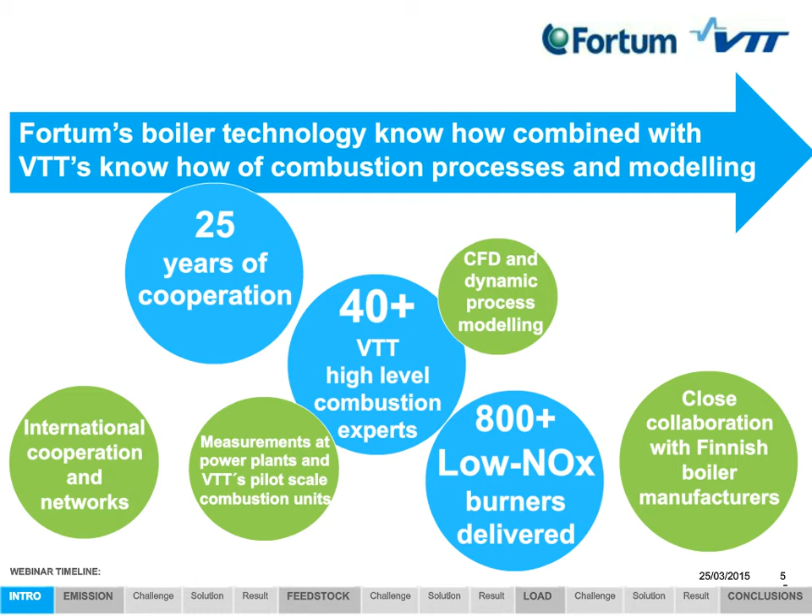Retrofitting old boilers to be more efficient and environmentally friendly. And what is coming more is flexible energy production, meaning the boiler has to be regulated more and more in flexible load changes. Also coming are different types of fuel mixtures, and biomass fuels, maybe co-fired in existing coal-fired units.

As Perttu mentioned in the beginning, we have 3 different cases here. Case number 1 we selected as an example of finding a low-cost solution for minimized emissions. This plant is located in the middle of Finland, the Rauhalahti BFB boiler, and it's actually one of the biggest BFB boilers in the world. Originally it was a PF firing unit, and more than 10 years ago it was converted to a BFB boiler.

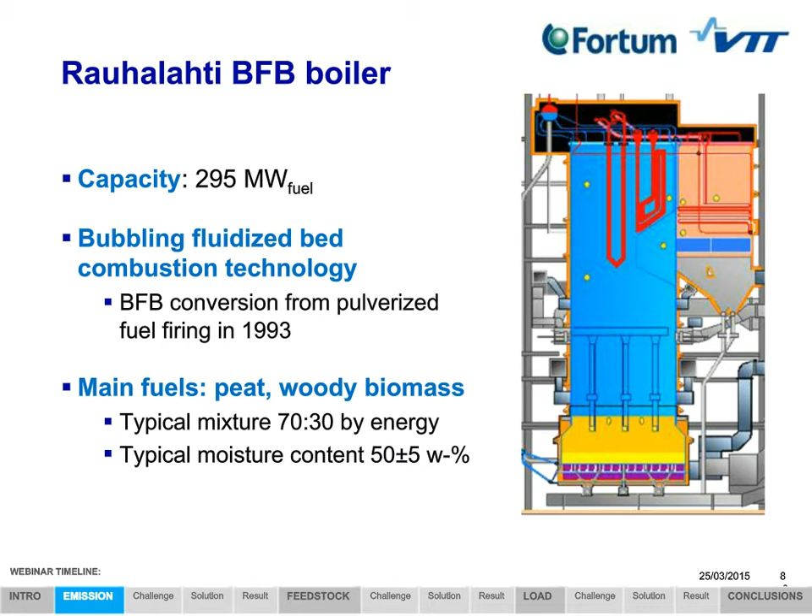The main fuels of this plant are peat and wood-based biomass. Typically, peat is more than 50% and the rest is wood-based biomass. The typical moisture content of the fuel is more than 50%. The challenge in this particular case was to reduce the NOx emissions to the new IED limit. In this plant, the limit is 200 milligrams per normal cubic meter.

As an old plant, the target was to find a cost-effective solution, and we worked together with VTT and found a two-stage solution. First, we improved combustion, especially the air staging in the bed, to reduce the emissions, and the second method was urea injection after this primary reduction.

Okay, this is Perttu Jukola from VTT speaking again. Computational fluid dynamics modeling was applied in different phases in this project. First, it was used to develop the new air staging method targeted for BFB boilers in general. Then in the second phase, it was utilized to study this particular Rauhalahti case.

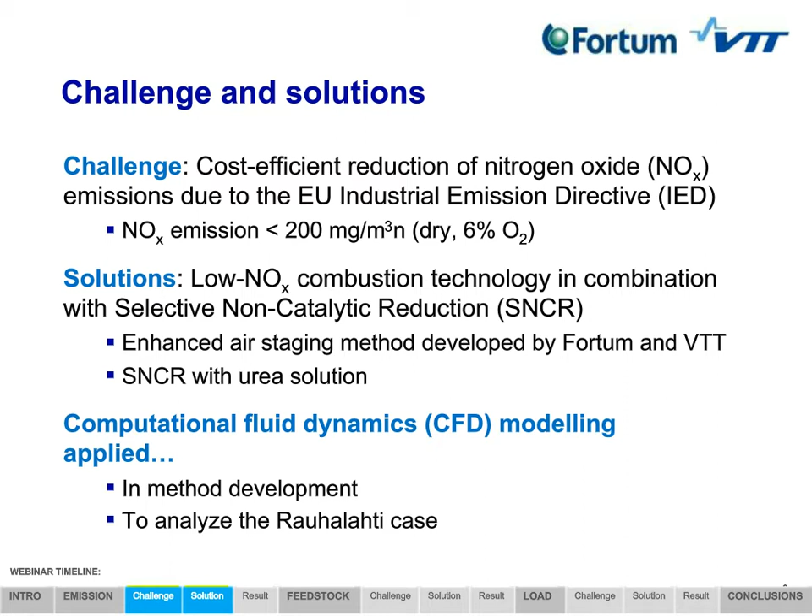Here you can see some results from our CFD modeling studies concerning nitrogen oxide formation in the furnace and the emission. On the left-hand side, you see results from the preliminary studies where we demonstrated the potential of the new enhanced air staging technique to reduce NOx in the furnace. The principle is to optimize the air distribution in the lower part of the furnace for overall NOx performance.

After these preliminary studies, the furnace was modified according to the principles we suggested. On the right-hand side, you see modeling studies of the realized system, simulated also with urea injection. We were not able to go as low in NOx as predicted, mainly due to process limitations and changes in fuel quality. But we were able to demonstrate that by injecting urea into the furnace, NOx emission can be reduced below 200 milligrams per cubic meter.

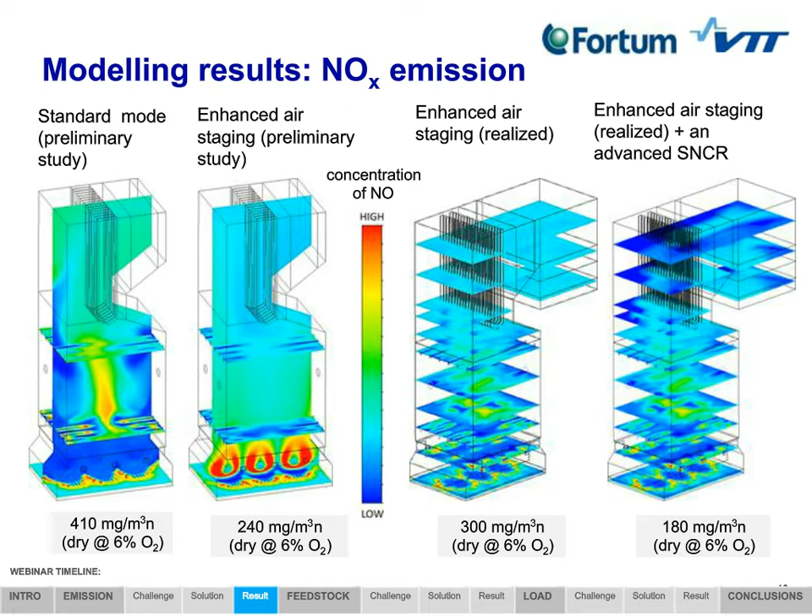Of course, for emission predictions we have to describe the whole combustion process in our simulations, and other topics are interesting depending on the case. Here are two examples from the Rauhalahti case. On the left, you see temperature distributions inside the furnace before and after the modification. Combustion clearly shifts downwards with the new air staging system, so we can better utilize the lower furnace for combustion and heat transfer, and with proper air staging get the best emission performance without compromising fuel burnout or CO burnout.

On the right-hand side, you see how we looked at furnace availability. Here the main subject was furnace wall slagging in the lower furnace. An intermediate solution for the enhanced air staging system caused some particles to go to the furnace walls, and as the lower walls were refractory lined, the surface is quite hot, so the particles tend to stick to the walls.

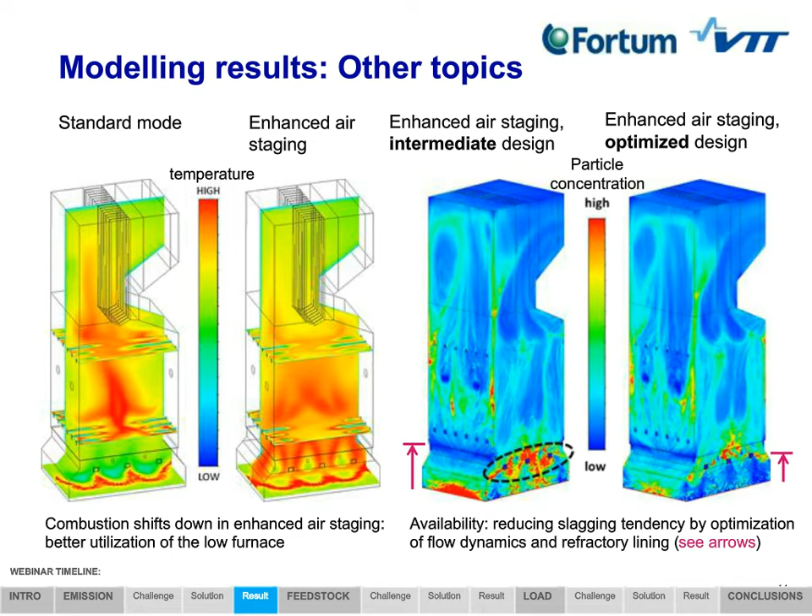Those were the modeling studies, but then, of course, some experimental measurements were done. They were done in performance test studies with this enhanced air staging method combined with a temporary urea injection system. And the measurements showed that truly with this new technique we were able to reduce base NOx emission from 400 to about 300 milligrams per cubic meter. And with the temporary SNCR system, the emission went below 200 milligrams.

But now we have to state that the temporary injection system was not optimal in this case, as the ammonia concentration remaining in flue gas was rather high, indicating that the injection lances were located too far or too high in the furnace, considering the residence time and the temperature levels in the furnace. But in the simulations we were also quite nicely able to reproduce the measured results, and this case was used for model validation.

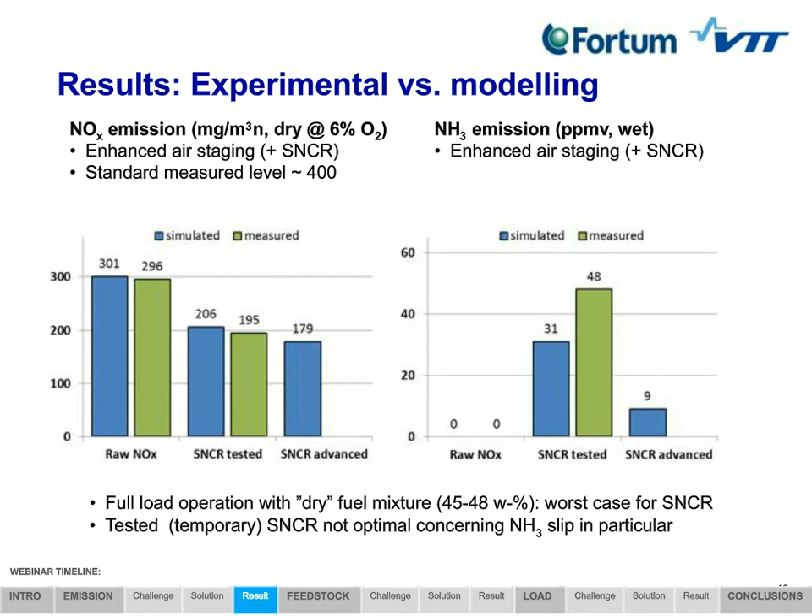Antti Heinonen, Fortum. As Perttu already mentioned about the results, as a conclusion, this was a really good case where we could utilize modeling and get feedback from the real process. And as a result, summarizing here, by primary methods we were able to reduce the NOx level from around 400 to 300, and by SNCR from 300 to less than 200 milligrams. And what was also important is that we didn't, let's say, spoil the boiler operation. So heat transfer had no change. Also CO emissions and fuel burnout were at a good level.

And the next step in this particular case is that we'll optimize the performance, and then there will be a permanent SNCR installation. With a similar type of procedure, we have one reference in Poland with a PC firing unit, where we made the same approach. So first we improved the existing primary combustion, low-NOx combustion, and we were able to reduce the primary NOx to a really low level, so that the rest to reach this 200 milligrams per normal cubic meter could be achieved by SNCR.

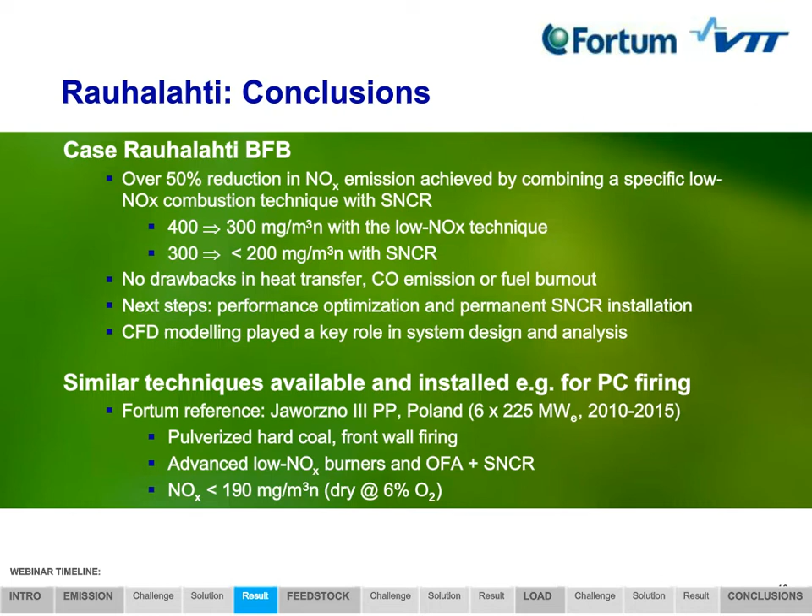Then we have the second case. It's about expansion of feedstock in coal firing. This unit is also located in Finland. It's a PC firing boiler, a pretty old one. The thermal capacity is 560 megawatts. It's a very traditional hard coal firing unit, opposite wall firing furnace. In this boiler, we have a low-NOx combustion system, with low-NOx burners plus an overfire air system. And 3 years ago, the boiler was retrofitted so that a gasification plant was built, gasifying biomasses, and the gas from the gasification process was led to the existing coal-fired unit. The gas-firing capacity was 140 megawatts by fuel energy.

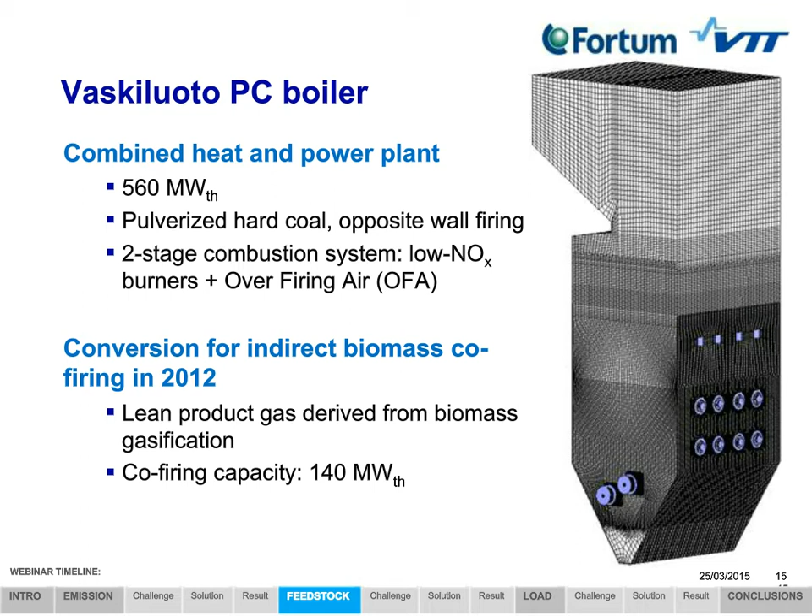Here, in this case, the target was to ensure the efficient and reliable operation of the PC boiler furnace when introducing such a big amount of gas firing. So the target was not to disturb the coal firing process in the furnace. In Fortum's scope, we delivered 4 lean gas burners, low-NOx burners, and we were also involved in commissioning, and we were responsible for optimizing the system.

Here we also utilized the CFD model. First of all, for finding the best location of these 4 lean gas burners in the furnace, especially not disturbing the coal firing. And we also utilized the CFD tool when we made the design for the lean gas burners. They were tailor-made burners for this particular process.

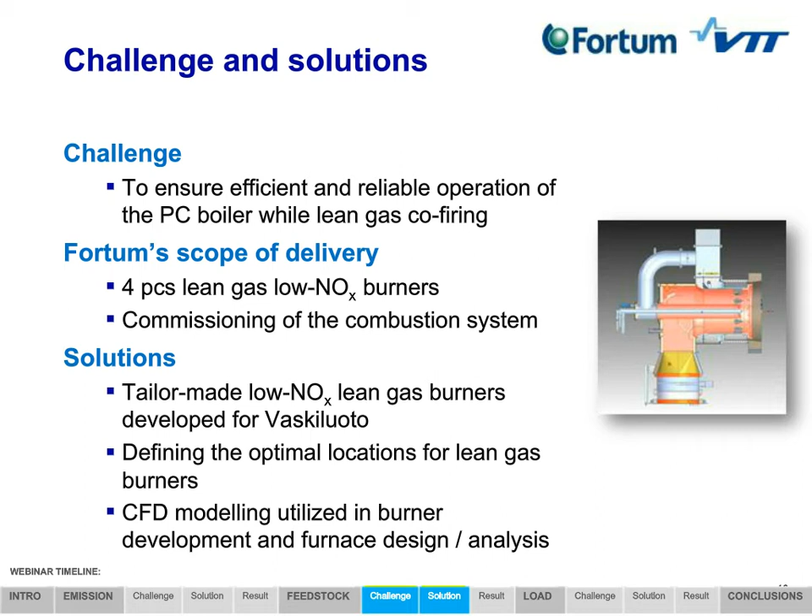Yes, this is Perttu Jukola from VTT again. So in the first phase, we studied the burner geometry by means of CFD modeling. In the beginning, we had a base geometry that we fine-tuned with the CFD model to get the flame characteristics that we desire for the lean gas burner. And in the end, we came up with a solution that predicted good flame stability. As you can see in the left-hand side picture, the fuel ignites in the inner region and also in the outer region, so from 2 points.

So this proved to be true in the real case also. The experienced flame stability of the lean gas burners has been excellent, which leads to the possibility to operate the boiler in gas-only mode, at partial load operation, of course.

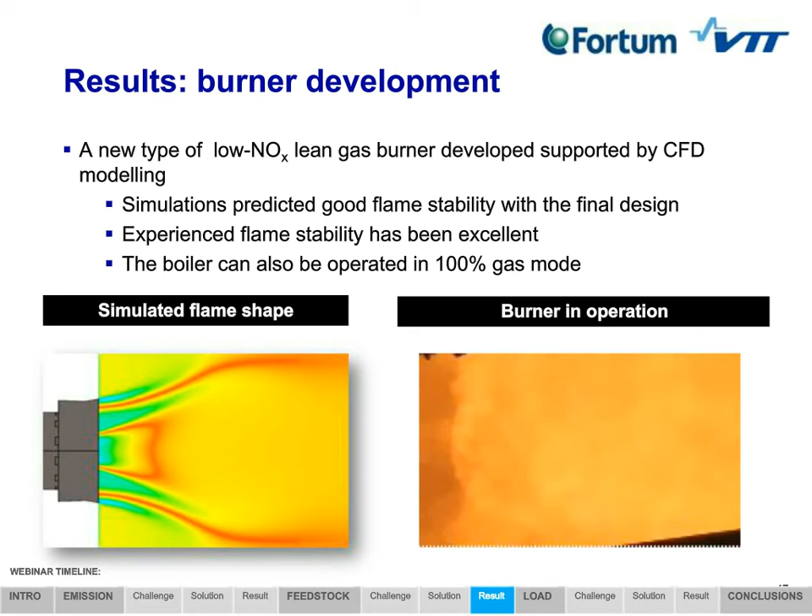On the right-hand side, you see a still picture of the burner in operation, and here we also have a small video captured from the gas-only operation of the burner. You see the burner opening on the left-hand side of the picture. This is quite a short video looping 3 times here.

And you are able to see the very good flame stability that the burner ensures. In addition to burner modeling, we also studied the whole furnace process with the CFD model. And we compared the gas co-firing mode to the coal firing mode, and also studied cases with different loads.

We saw that as the burners were positioned in the lower part of the furnace on side walls in the hopper region, they affect the furnace flow pattern, and they a little bit reshape the coal flames also in full load operation. But after all, the major output values from the boiler, heat transfer, burnout, CO, and the emissions were predicted to remain similar to the coal combustion case.

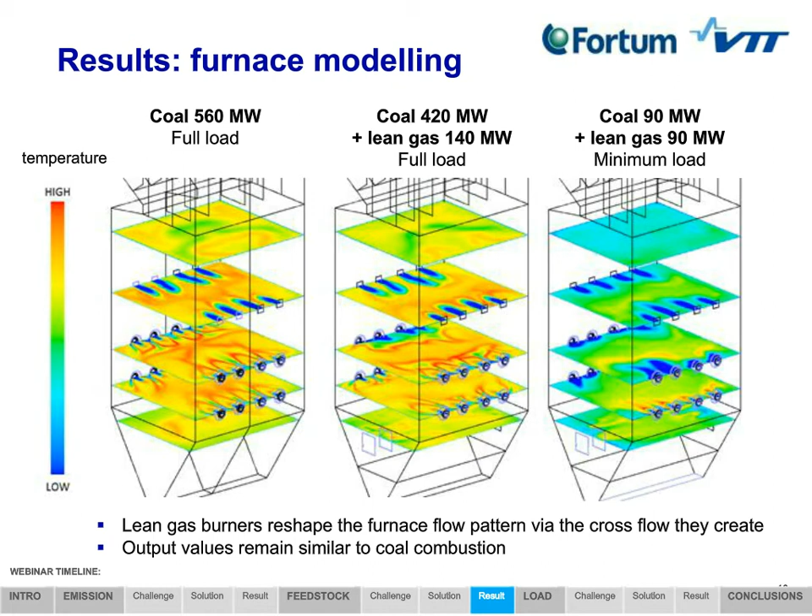Okay, Antti Heinonen, Fortum. So here is summarized the conclusion of this project. So basically what was designed was also achieved. So we could substitute 25% of coal with lean gas combustion. There was no disturbance with coal firing. Of course, we made some optimization of the airs after modification, and the flame was really stable, as you could see in the video, and also there was no side effect on the boiler normal steam cycle.

In addition, in order to have this biogas firing, there was also reduction of NOx emission by 20 to 30%. Here we can also summarize that this was cooperation between the modeling team and also with our burner manufacturing and burner design. That was done in a perfect way, and we got a good result from this project.

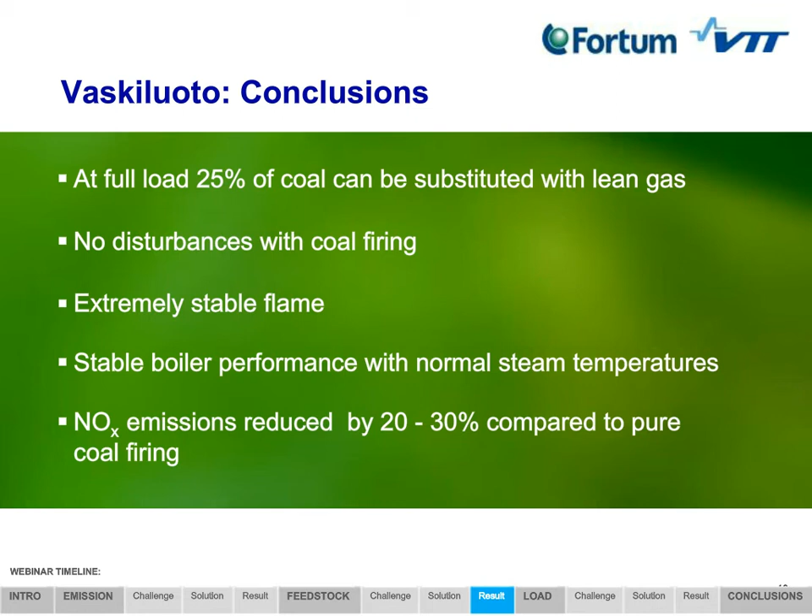Okay, this is Hannu Mikkonen speaking from VTT. I'm going to tell you something about managing of load changes due to increasing solar energy, how to integrate solar power and conventional power plants by using the APROS programming tool, which is owned 50% by Fortum and VTT.

So as we have read from the news from, for example, Germany, wind power and solar power have increased drastically for many years, and how to handle these peak loads and that kind of characters, which are actually new. So we have 3 points to develop this target. So operating with these peak loads and base loads can be very hard. Secondly, utilizing existing infrastructure, and thirdly, balancing the distributed intermittent production. And smooth changes during these load changes are very important.

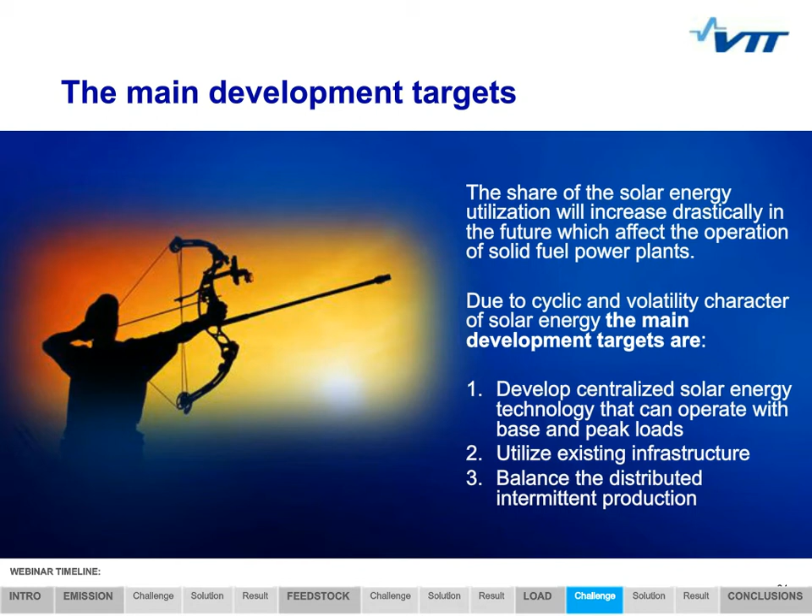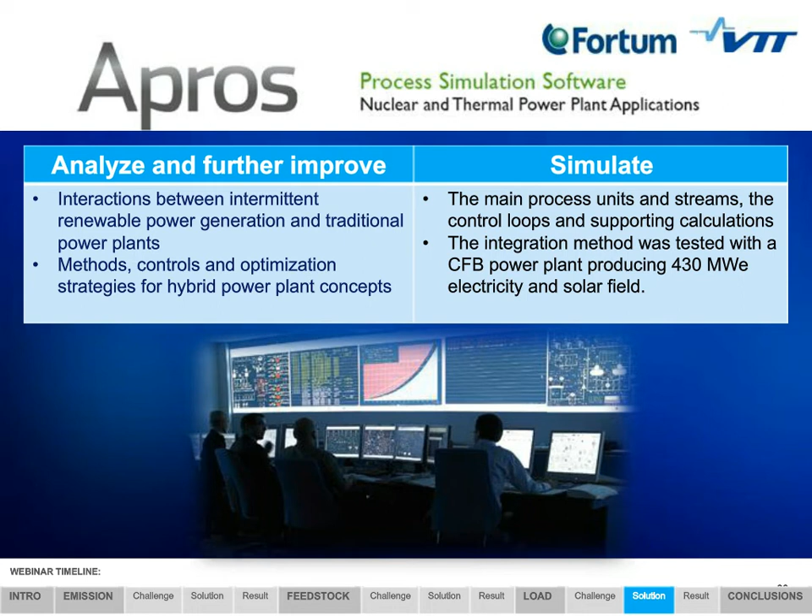On the simulation side, we have made a model from the CSP and conventional power plant. Actually, a CFB power plant with 430 megawatt electric power and a solar field, which you can see in the next slide. The power of the CSP unit is about 10 megawatts, but in this picture you can see this CFB power plant from the gas side, and here's the furnace side, and we are feeding in air from here, and also fuel from here, and sand and limestone, and here are the flue gases flowing out.

As we know, one of the CFB combustion technology advantages is flexibility of fuel. We can use different fuels, and in this case, the CFB steam values were about 560 Celsius degrees and 275 bars. And this model includes all the needed equipment for water, steam, air, and flue gas systems. And with this model, we can make load changes, for example, stabilize the steam values and electricity production, and also control. We are using a control system to handle these load changes.

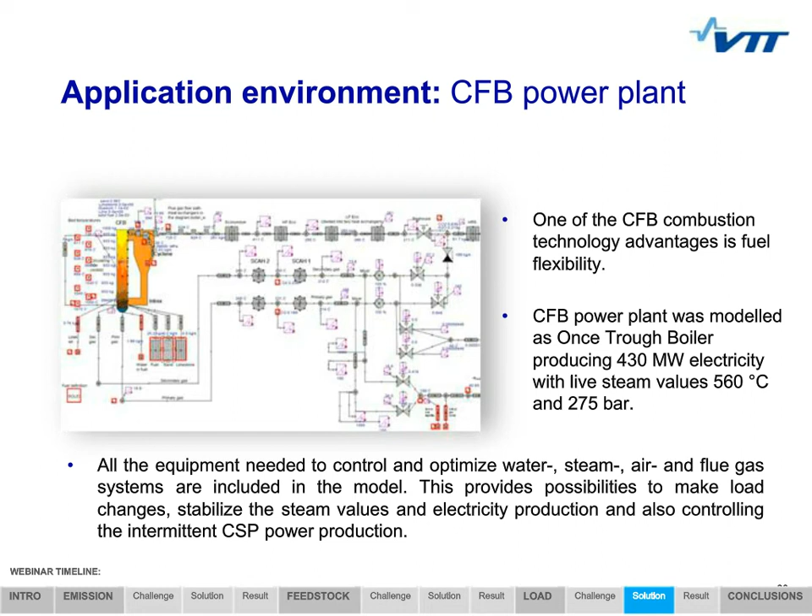So this environment, of course, is not so simple. We are using here hierarchical models. Every block includes lower model levels, and in this model we can see this is modeled as the parabolic trough technique. And it includes also weather modules, which means that we can situate this CSP power plant with coordinates wherever we want on Earth. And these models calculate solar radiation and tracking of these collectors, which you can see here.

And from this process, I can tell that this part of the process is preheating the feed water, and it's flowing into the tank where steam is separated, and it's flowing to the superheating sections. And output steam is controlled by spraying water valves.

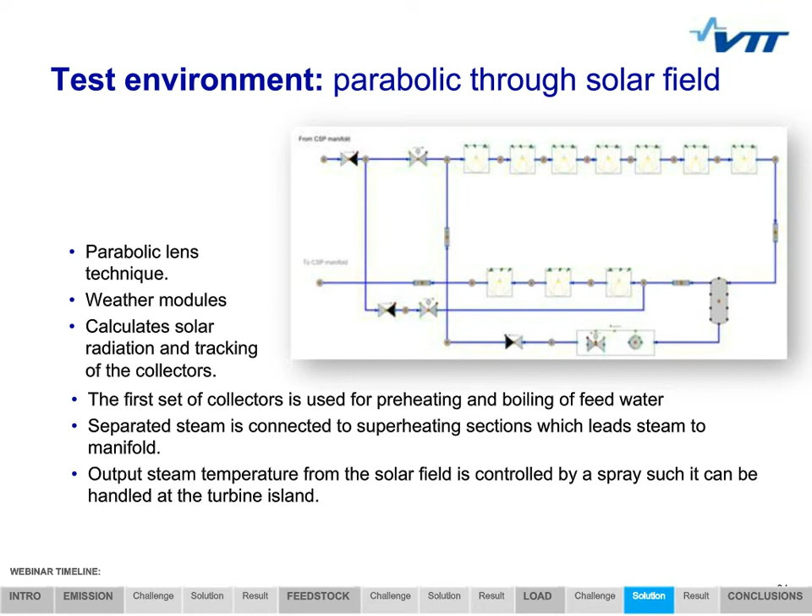So from the boiler part, as I mentioned, this is furnace, turbine side, and CSP field. In this case, feed water is taken from the boiler condenser part, flowing to the solar field, and steam is used for boiler feed water preheating to replace steam flow from the turbine tappings actually. So the power from the solar field is reducing this tapping,

some of these high pressure parts. And when we are inserting steam to the boiler part, there can be some problems with emissions, varying gasification reactions, for example. There can be local hotspots, and of course the fluidization in the furnace also. So problems can be quite many.

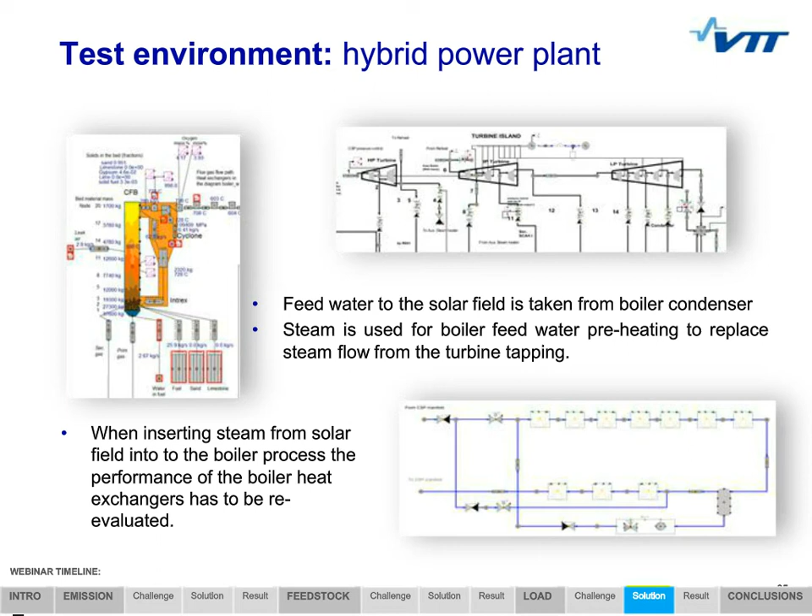So here's the results part. In the first picture you can see the blue line, CSP temperature about 500 degrees, and the red line, CSP steam flow to the turbine about 20 kilograms. In these, you can see the red line is steam from the CSP, about 500, same as earlier, and the blue one is feed water to CSP, about 90 degrees. Next, red, the produced CSP pressure is about 50-60 bars, and blue, flow to the CSP about 12.5 bars.

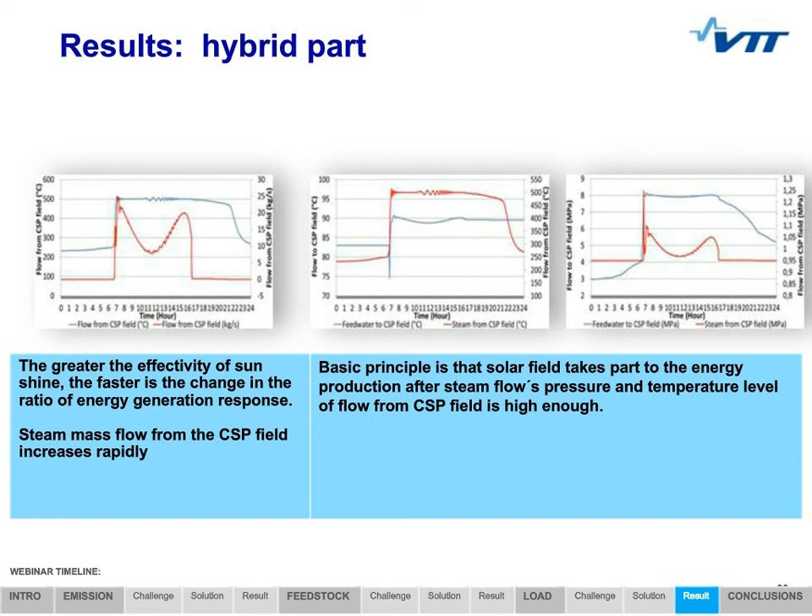And in this picture, you can see that when we are taking in the CSP field, it will change the load rapidly. That is because steam pressure from the CSP has to be high enough. On the left side of this slide, you can see condensate flow from the boiler to the CSP, and here are the main parameters on the boiler side. And here you can see when we are using CSP steam or inserting it to the boiler, it's about 10 megawatts difference in power production.

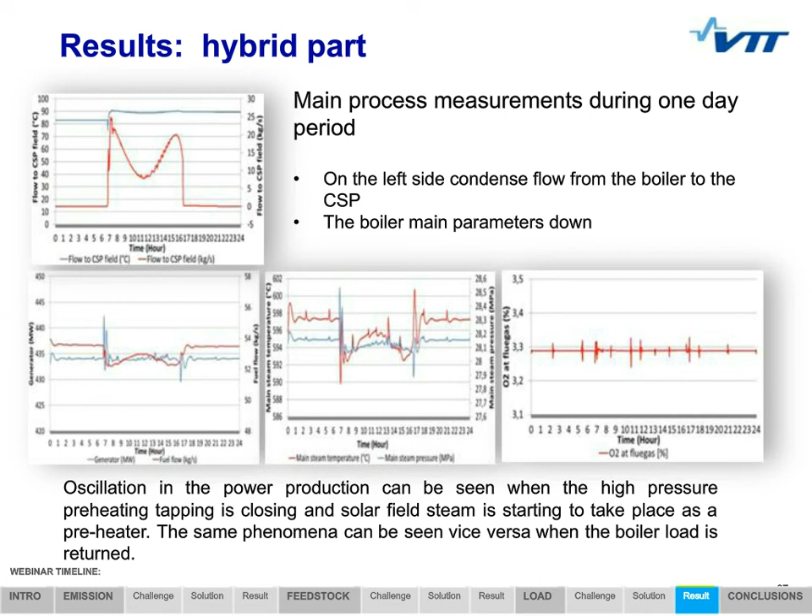So conclusions. In this case, there was this conventional power plant, the CSP plant was constructed, and it is an excellent base to study this kind of control issues and behavior of the system and both of the plants. And there can be a lot of problems which we can see by using simulation tools. These are these rapid load changes, which can cause unsteady combustion conditions, and further can lead to unexpected emission formation, gasification reactions, local hotspots, and de-fluidization, etc.

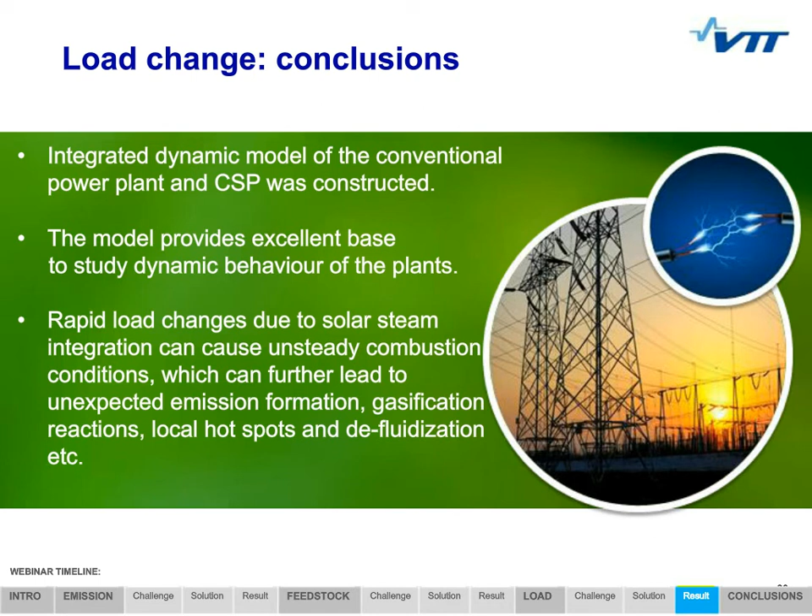Perttu Jukola again from VTT. Coming to the webinar conclusions, we can say that together Fortum and VTT can deliver world-class solutions in boiler and combustion technology by combining our competencies in technology and modeling. We have cooperated for a long time already and have solid references from boiler retrofit cases based on a modeling-aided approach. We think that modeling is a very efficient and cost-effective tool to design burners and boilers, to analyze them and to study dynamical behavior of power plants. Modeling can also be utilized for troubleshooting, optimization, and process development purposes, for example.